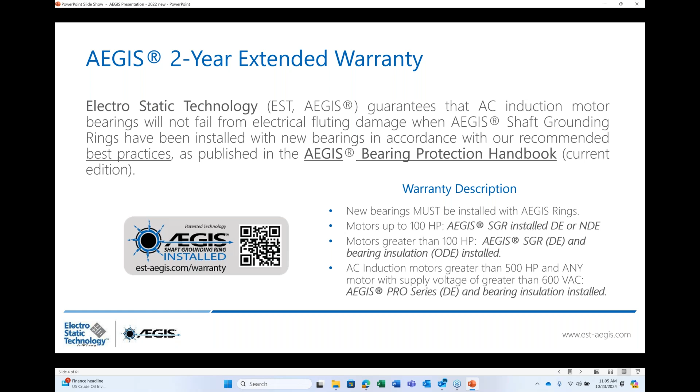So, this is where it all started. Pulse width modulation on a drive, or what's known as PWM inverters, or VFDs, have recently been found to be a major cause of motor bearing failure in inverter drive systems. Now, that was in 1998.

There are many different sources out on the internet, research studies, and that kind of thing. The point of this is that one of the ways that we know electric motors fail in about 50% of the cases is by using a VFD on an electric motor. Doesn't matter who makes the motor, doesn't matter what horsepower it is, doesn't matter what the electrical requirements are, doesn't matter where it's being used. We do see this all the way across the board. I have heard several comments from people saying, well, we do really good maintenance, so we don't have this. The fact here is that if you have electric motors and VFDs, you have this, you just haven't recognized it yet.

So that's literally where it comes down to. It doesn't care what industry it's in. This will cause problems for you between VFDs and motors, and that's not the only way of actually creating problems. Why is this important? Because the cost of having motors go down prematurely is fairly high.

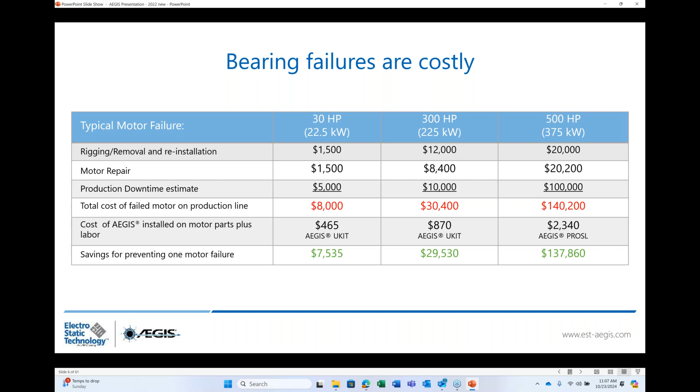So there's two types of currents that we're going to talk about. One is called capacitive EDM currents, and I'll refer to it as induced shaft voltage for this presentation, induced by the VFD, and is picked up by the rotor, acting as a capacitor, and then dissipates through the most conductive path, which is 1 or 2 of the bearings, and then also down the shaft, so you're using a gearbox or a pump or those kinds of things.

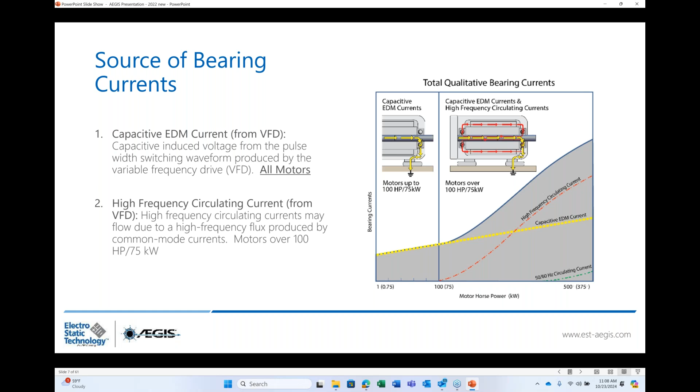The other thing we're going to talk about is high frequency circulating currents. High frequency circulating currents are not something that you see every day, but they're out there and will cause problems, and the problems look pretty much like you have VFDs that are creating problems for your motors or for your bearings. So those are the two things we're going to talk about today.

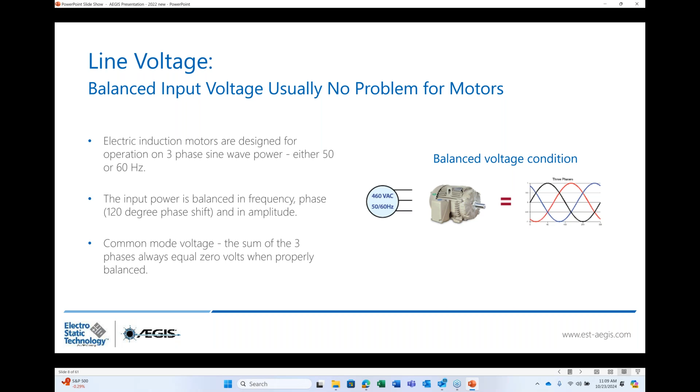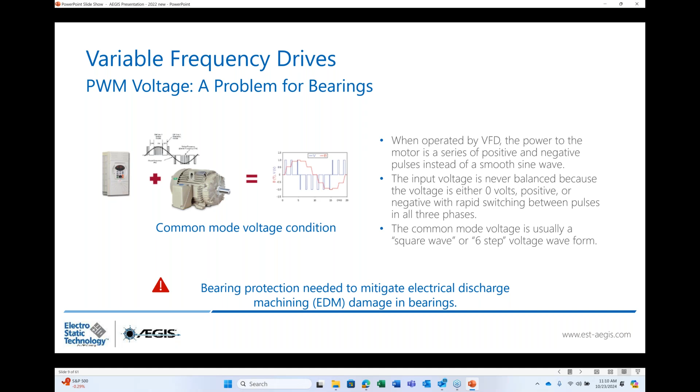That's producing extra energy. Now that extra energy does not actually make the rotor go faster, but is capacitively coupled from the stator onto the rotor, with the rotor acting as a capacitor. So that being the case, it's going to suck up all of these very small stray electrical charges, capacitively coupling from the stator to the rotor, and that's going to live on the rotor. Eventually, when it gets too much for that rotor or capacitor to hold on to, it's going to look for the path of least resistance. That could be the non-drive end bearing, the drive end bearing, or down the shaft into your driven equipment, whether it's a pump, gearbox, any type of machinery. These electrical charges will want to take the path of least resistance.

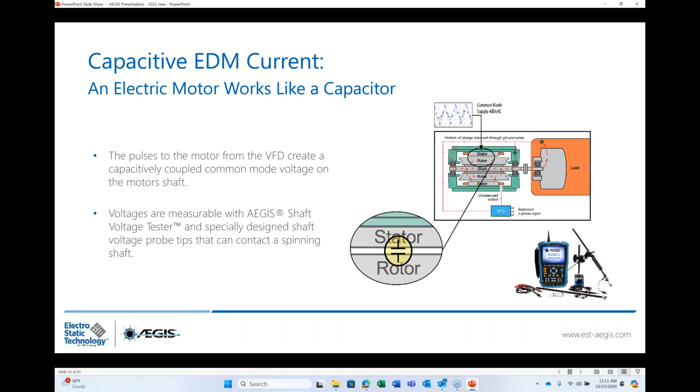So if the path of least resistance is the drive end bearing, it will essentially burn a hole through the grease that's inside of the bearing. Let's use Polyrex as a good example—Polyrex EM is the standard bearing grease for most bearings, and its upper operating temperature is 375 degrees Fahrenheit.

The electrical charge that wants to drive through that bearing and reach the grounded housing of the motor is 1,000 to 1,200 degrees. So by a factor of 3, there is a lot more energy than necessary. Basically what it does is it burns the grease. So if you've used Polyrex, it's blue or green, it turns black. We'll see that in a few pictures, or let's take a look at these right now.

Every electric motor, because the rotor is spinning, that rotor is going to act like a capacitor, and it's going to collect those stray electrical charges. Now this could be the case where you have, say, you're making non-woven fiber. You can have static charge buildup, and it will actually affect many things in your system.

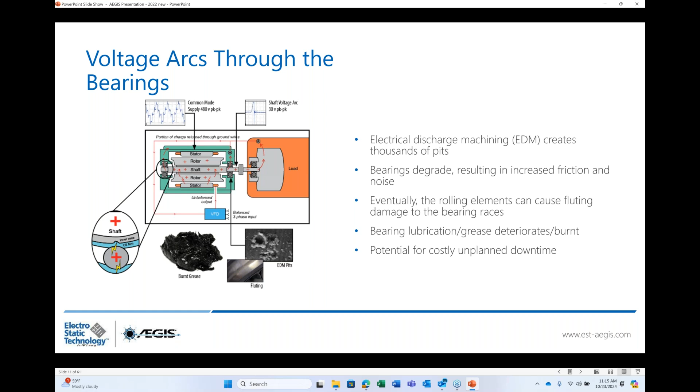Now what we do know is that if I line up 100 motors, and we've done this in many manufacturing plants, data centers, rocket test facilities, I mean everything, what we find is that about 50% of the motors, when you use an oscilloscope, we can find this image on the oscilloscope. Now that doesn't mean that 50% of your motors are going to fail in 2 weeks or 2 months.

There is a correlation between the amount of voltage and how often it discharges. The higher the voltage, and that typically is somewhere between 0 and 35 volts, we've seen it higher, but it's somewhere in that range. Typically we'll see 10 to 15 volts on the shaft. And then you have the rate of discharge, pretty average, 15 to 18,000 times per minute.

That means an electrical charge going through, burning a hole through the grease, and then damaging the inside of the bearing. The rolling element doesn't get damaged, it just turns dull, but the actual outer housing or race on the bearing is going to take a beating. So by using an oscilloscope, you can actually see what's going on without having to pull your bearings out, and you're getting a very accurate picture of what's going on in real time.

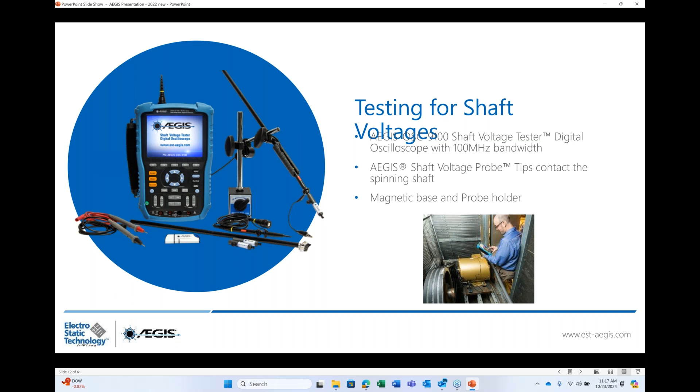If you have this on an oscilloscope, what you're going to find is you will have premature failure of your bearings because, one, they're burning up the grease in there, and number two, you're actually roughing up the inside of the bearing—both detrimental to bearings.

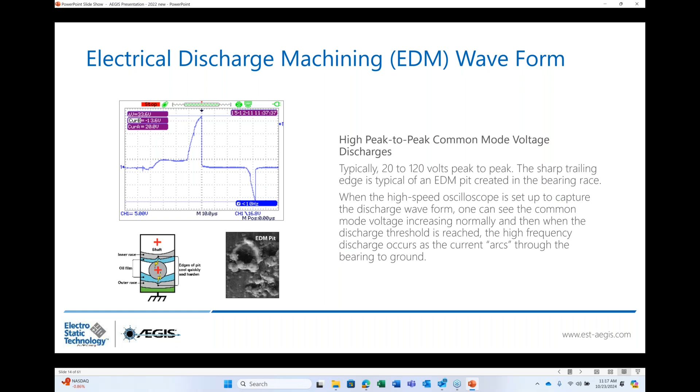EDM, or electric discharge machining, is a fancy word for a spark that goes from the shaft to the inner race, to the rolling element, to the outer race. And the outer race is typically going to show either frosting or fluting.

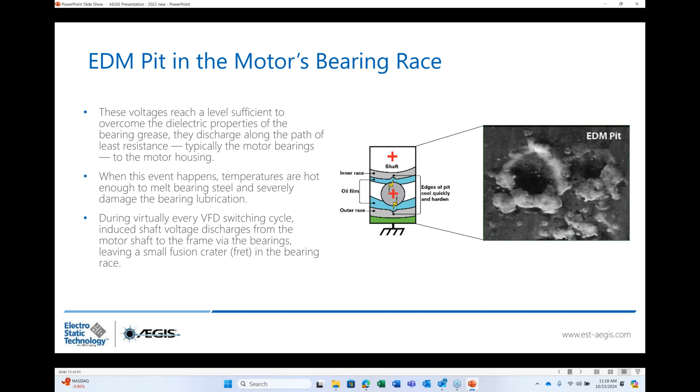The frosting will simply look like a dull gray stripe in the middle of the bearing. But if you magnify it, what you're going to find is that frosted surface is just millions of points where electrical discharge have hit the inside of that bearing. And that's when you start hearing the motor have a howl to it.

The second condition you can often see is what's called a fluted bearing race. This is interesting because it actually puts a pattern on the inside of the bearing itself. When you get to this point that there's fluting, it is really difficult to stand next to, say, a 100 horse or a 500 horse motor and have it run, because you can tell it sounds like it's tearing itself apart.

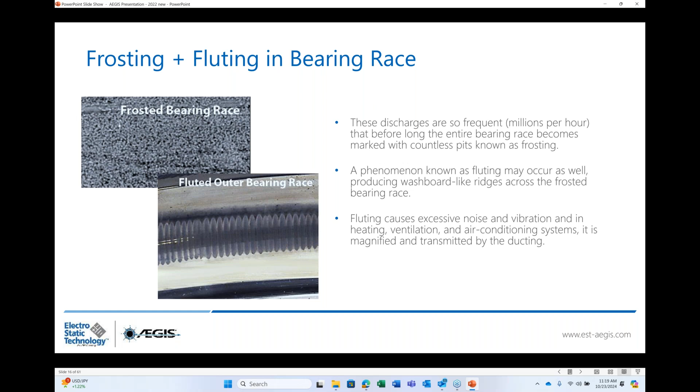So these are the two conditions. If you do a post-mortem on your bearings, which we always say you should do, pull the bearings out, cut the outer race open, and take a look at what you have. If you have frosting or fluting in there, you have electrical discharge that goes through the bearings. So it's important to know your diagnostics here, whether you're using a scope or using the cut and inspect method. Either way, one is a little bit quicker than the other.

So here's a good example of frosting and fluting. Let me go back to this previous picture here. The fluted bearing picture on the bottom portion of this slide looks like it's nice and uniform.

Well, let's take a look at this one. This one is actually fluted, and you can see in the red circle three kind of muddy stripes on the inside of the bearing. That's just how it starts.

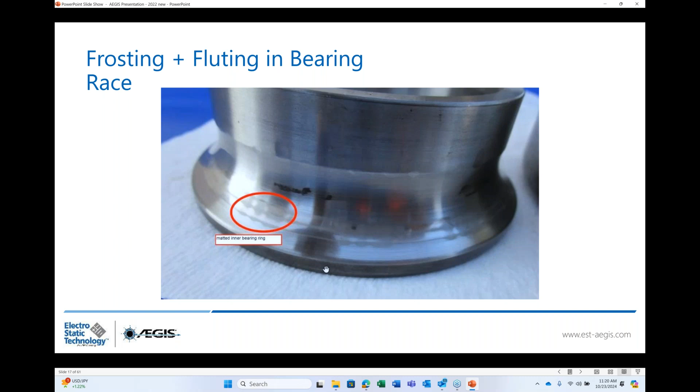Here's another example where you're going to see these lines that go across the bearing. Eventually what's going to happen is those lines will start to fill in. And then that's when you really start hearing a fair amount of noise on the inside of the bearing.

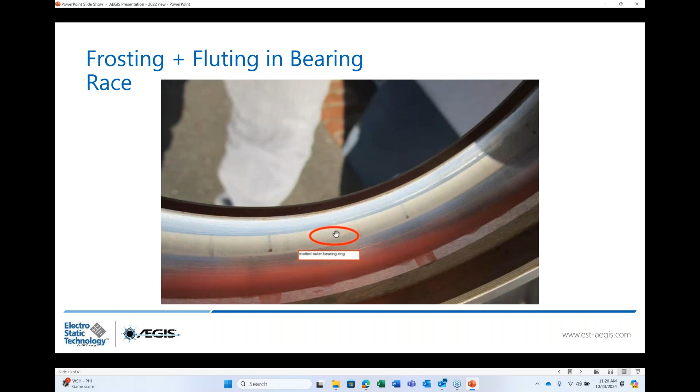We saw this picture before, but it's instructive if you think about it. Always look at your bearings. If you are sending your bearings or your motors to a motor shop, make sure that you ask them to take pictures and give you a report. Your motor shop is the expert on this stuff, and we have done a lot of training with motor shops and that kind of thing to identify what's going on here.

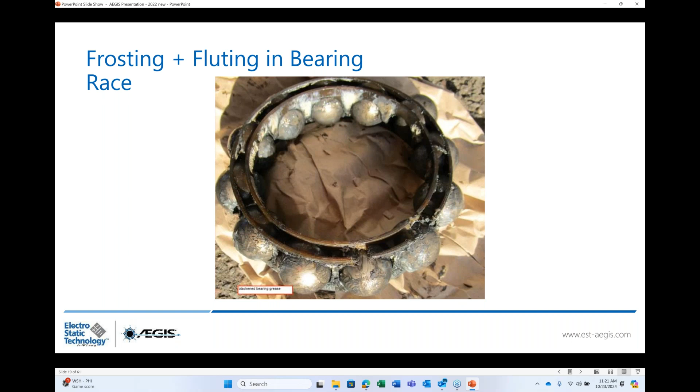Currently, on my email, I have a customer that sent me all the pictures, and they said, hey, we have a problem here. We started this motor up and it failed within 2 weeks, meaning it has fluting on the inside of the bearings in 2 weeks. Those are rather extreme cases. Typically, it doesn't happen that fast, but when it does, it's very frustrating. Either you better have a spare, or you better be able to fix this quickly, because if you take large motors down like this, the production line typically is not going to run very well.

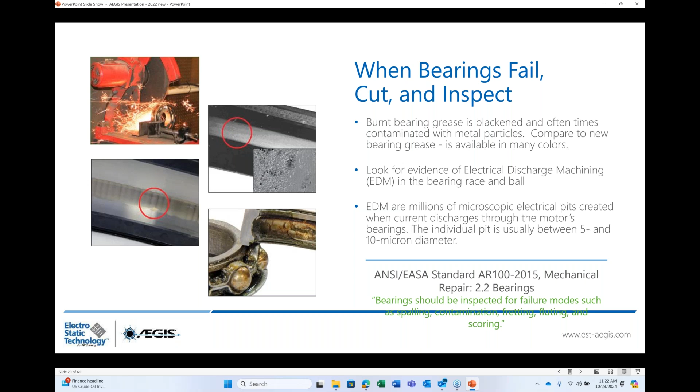So cut and inspect, or actually use an oscilloscope. We sell the oscilloscope, and it works real well. We've got thousands of them out there in the field in all kinds of situations. Whenever I'm called in, I also use an oscilloscope to make sure that we're getting the right diagnosis for that motor.

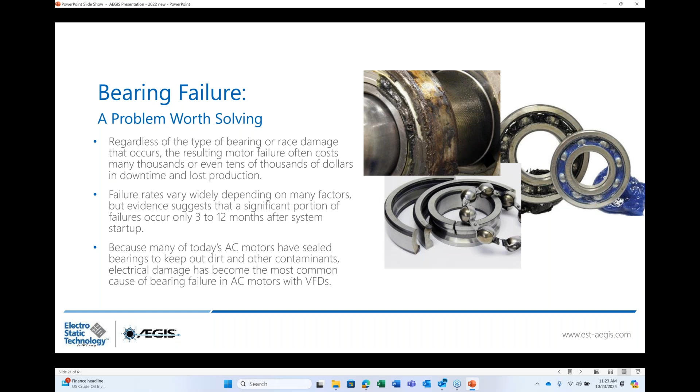So that's where we stand currently on induced shaft voltage. There are many different kinds of electrical problems that you're going to run into with a motor. You can have a situation where you're producing a product that creates static, whether it's non-woven fiber, carpet, polyester, or nylon. Say you're weaving it into a carpet, it creates a tremendous amount of static electricity, and it only gets worse during the wintertime when there's not as much humidity in the air.

But the most common situation we see is VFDs creating these problems. There are no adjustments you can make on a VFD that's going to help this out or eliminate it. It just happens to be the combination of the motor and the drive.

The best way to solve that is to simply use shaft grounding. The most long-term shaft grounding devices on the market today are the AEGIS. We actually published 200,000 hours specifically of runtime at 1800 RPM, so that's double the lifespan of the bearings. It shouldn't be too much of a stretch to figure out that you need

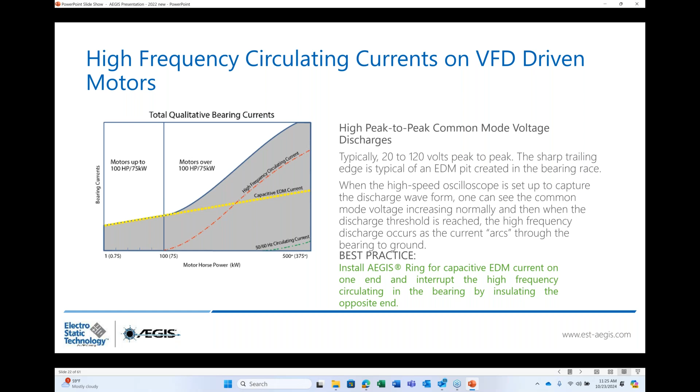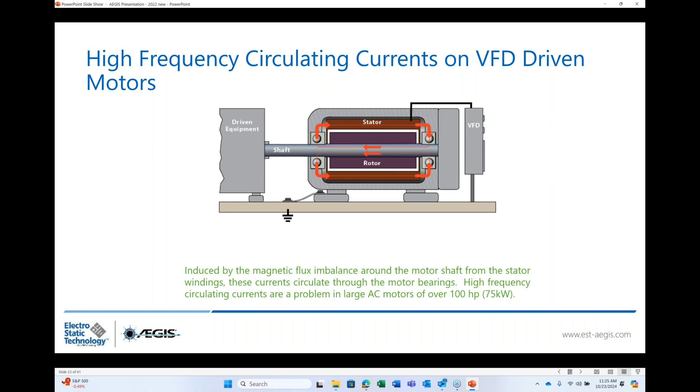So the next thing we're going to jump into here is circulating current. Circulating current is a condition that you're going to find in motors. This is not caused by- this is caused by having issues with your air gap, or having slightly more copper on one end of the motor than the other in the windings. So there's a bunch of different conditions that can cause, or have the potential to cause, circulating currents.

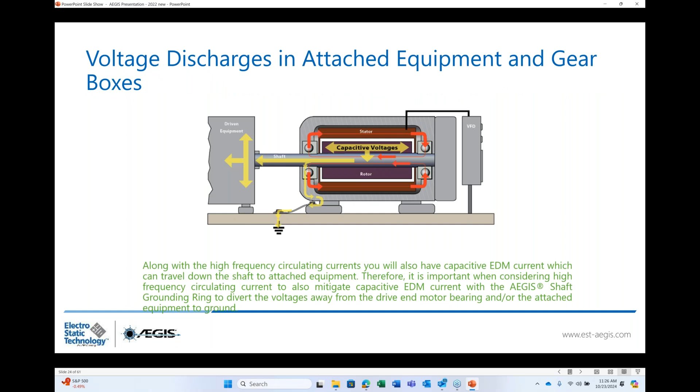These are fortunately very easy to take care of. Use an insulated bearing on the non-drive end, or use an insulated sleeve. Basically what that does is it stops that circulating current from going around. So by insulating a bearing, sleeve, or using a hybrid bearing, it literally stops that - it will give it a path. And then you also want to use a shaft grounding ring.

One of the things that you definitely need to do, though, is to make sure that you have a decent ground. You can put shaft grounding rings, you can use colloidal silver, you can use insulated bearings, but none of these things are going to work if you don't have an active, low resistive ground.

Having a ground, and you can see where we are talking about braided ground straps. Braided ground straps are basically the superhighway for taking that high frequency discharge off the shaft before it goes through the bearings, and then taking it to earth ground safely. We find that using a braided ground strap, because the vast majority of motors out there are AC, or alternating current, the electrical energy travels on the surface of the wire. So what you do is you supply much more surface for that wire, and then you have a low resistive ground.

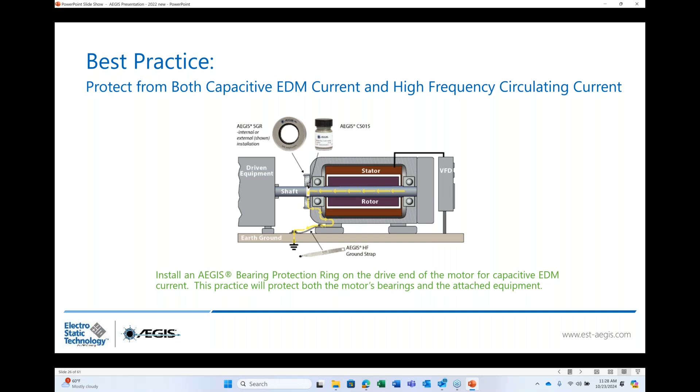So using shaft grounding will protect your motor from any type of induced shaft voltage, as well as circulating current. But for the circulating current, you need to make sure that you use an insulated bearing or an insulated sleeve in the non-drive end. And what you're going to find is that we always separate the insulated bearing. We typically will put it on the non-drive end and then use the AEGIS on the drive end, or vice versa - it doesn't really matter. But you don't want to put them together. You don't want to put the insulated bearing right at the backside of the shaft grounding ring.

The whole idea here is to create a high frequency path for your motor. There's a lot of times that we look at problems in industry, and what we found is there is a tremendous amount of times where there's either poor connection to the shaft with the shaft grounding ring, or there is a poor connection or a high resistive connection for your ground strap, meaning you don't have a good conductive path all the way to earth ground. It is necessary to lead that energy someplace. It's not going to evaporate into thin air. So you need to make sure that you actually have that going on.

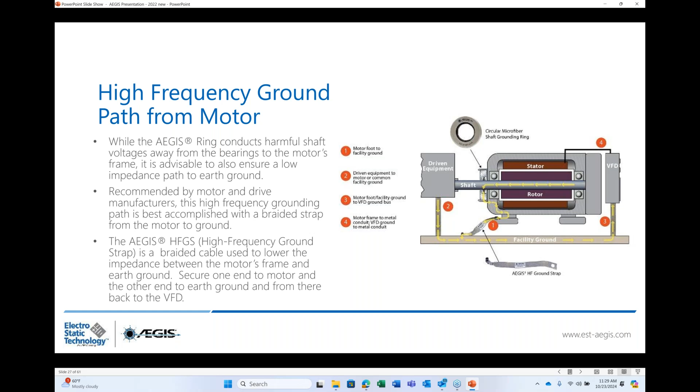With that said, we've covered induced shaft voltage and we've covered circulating current.

There's lots of different types of shaft grounding out there, but shaft grounding is one of those things that you need to make sure you know what you're using. If you use a Helwig carbon block, which is a fairly inexpensive and common way to do it, you have very little contact with that block after it starts running.

One of the conditions you get is something called glazing. Glazing is a clear, smooth finish that is plated out on the shaft and keeps the carbon block from actually contacting the shaft and working. I can tell you that I've been involved in many situations where we've actually tested the motor with and without the carbon block engaged, and it is exactly the same. It should be dramatically different if the carbon block was working.

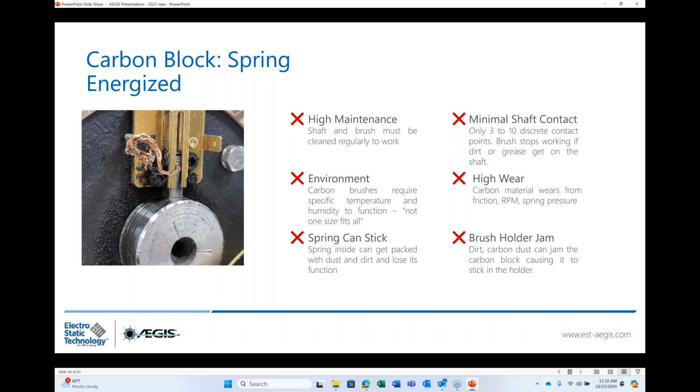Here's a carbon block in action. Creates a lot of carbon dust that gets into everything, including the motor. It's not uncommon to see a brush holder jammed. These do have to be maintained on a regular basis, meaning you have to pull them off and put a new one on. And you definitely get minimal shaft contact because you only get the size of the carbon stick that is touching the shaft that's going to give you that shaft grounding effect, as opposed to using something like AEGIS, which gives you 360 degrees of conductive microfiber, which is highly adept at actually pulling off that electrical charge and does not create glazing on that surface to actually have the ring fail there. So it's 100% shaft contact all the way around.

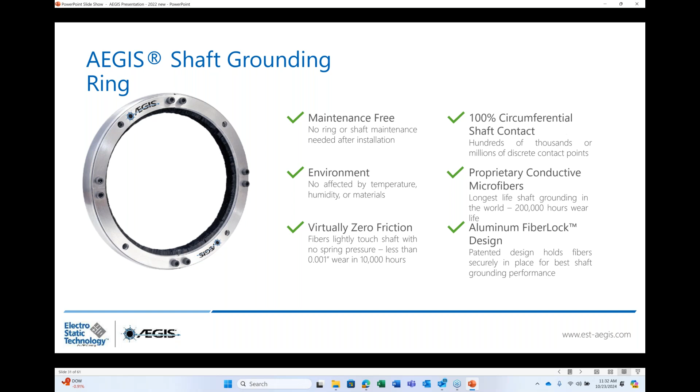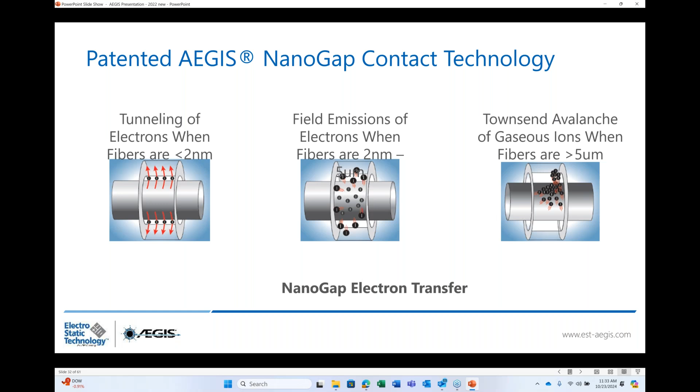If you're interested, tunneling of electrons, field emission of electrons, and Townsend avalanche of gaseous ions is how the AEGIS ring actually works. We have millions of these things in service around the world, and they do an exceptional job.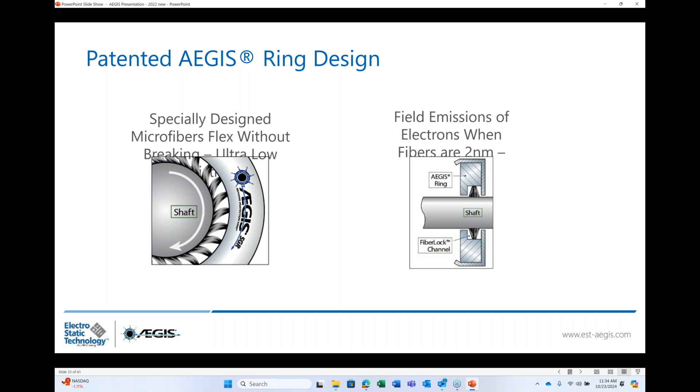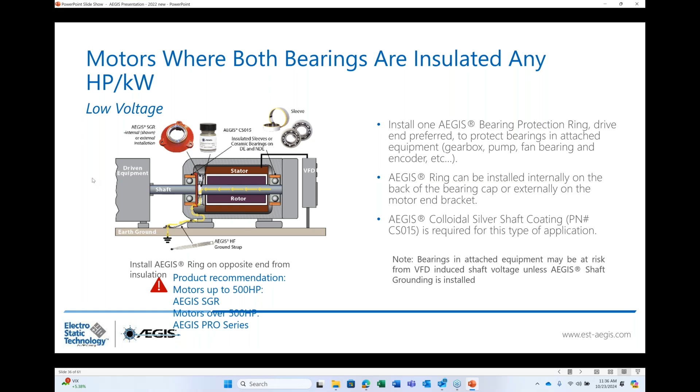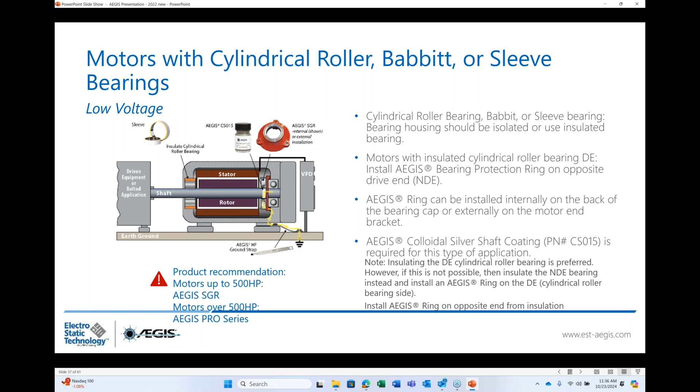Motors with cylindrical, Babbitt, or sleeve bearings. I know there's a lot of very large motors out there with Babbitt bearings. The Babbitting won't have the two conditions we saw before, but you can still see there's electrical discharge, and it will actually end up eating up your Babbitt in there. So cylindrical, roller, Babbitt, sleeve, doesn't matter what kind of bearing it is.

The vast majority of motors in wastewater treatment are vertical motors, whether they're hollow or solid shaft, really doesn't matter. What you're going to find is because there's a lot of metal to metal contact in the thrust bearing, which is at the top of a vertical motor here, in order to protect those bearings on top of the motor, because the whole rotor and everything is hanging off of that, the thinner the grease film, the faster that energy is going to go through that grease film and create a problem there.

So in the upper left-hand corner, you see a bearing carrier that has a white stripe on it. That bearing carrier has been sprayed with either Belzona or another non-conductive product. They spray it on and then lathe it off so that the bearings can fit specifically on the bearing carrier. Now you've isolated the top bearing so that electrical discharge can't get through there.

So now it's going to go down to the bottom, which is your guide bearing. The guide bearing is really important because it's going to keep all your vibration out and keep everything steady. But if you wear it out, it's going to be exactly the same thing. You're going to create problems for your other bearings by allowing vibration to build itself in, and then you end up replacing everything.

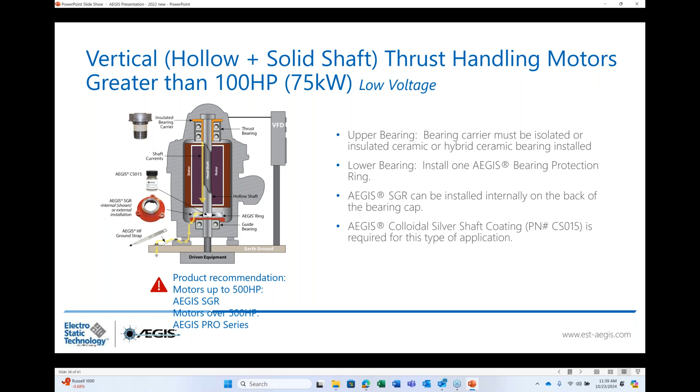So we also talked about the Pro Series, which is a 6-row ring for larger motors, typically 500 horse and up. And by the way, if you have a production motor, it's not uncommon for 400 and 300 horse to mount a Pro Series ring on there. These are for motors that run 24/7 and are looking to get the longest life possible out of them.

So the Pro Series is a whole category of motors that we can mount shaft grounding to in a variety of ways. You can see we have spacers on this one with brackets that come out, and everything gets screwed together with threaded holes so that you can mount it on the shaft. You can see the discoloration, the silver on the shaft next to the ring. That is where somebody has gone a little bit berserk with colloidal silver.

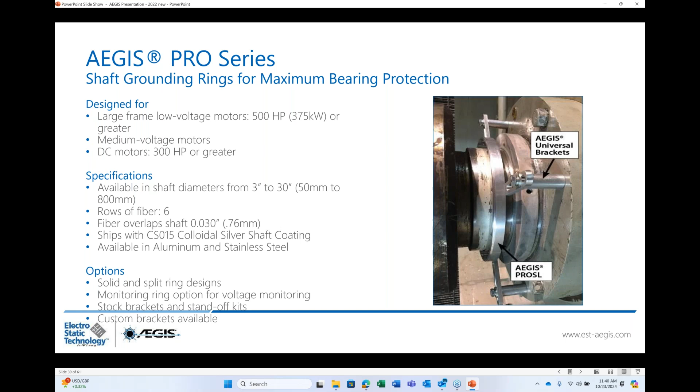Colloidal silver works, use it. It's micron particles of silver, and it is held in place by all the imperfections in the shaft, whether it's machining or pitting on the shaft, and you would have to chemically scrub it to get it out of there. So use colloidal silver — that makes a big difference.

So there's lots of different types of Pro Series rings out there.

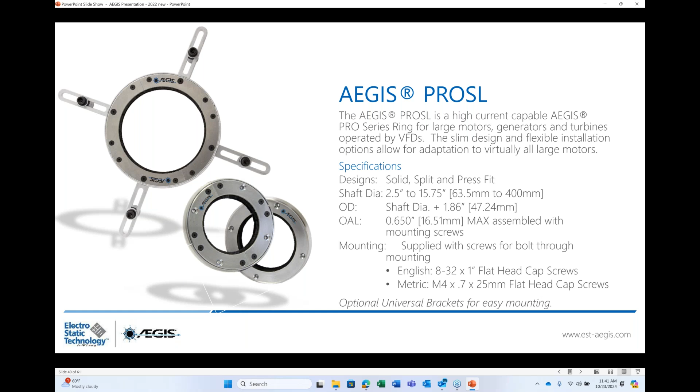SL is simply known as a slimline. It's 5/8 of an inch thick, not including the brackets and bolts, so we can fit them into pretty small spaces. It also comes with all the mounting hardware. If you order the hardware package with it, it comes with all the different spacers, bolts, the whole works.

So internal as opposed to external applications. It's important to understand that you can use AEGIS either inside or outside the motor, not a problem. But you have to make sure that if you're going to mount it on the inside, you have replaced the grease seals, and you are not going to pump in pounds of grease. It's grams of grease over a period of time, and you can go out to the internet and figure out how much grease you should be using on that bearing over what period of time, depending upon what speed it runs at, type of bearing, and how long it runs, whether it's 24/7 or something less than that.

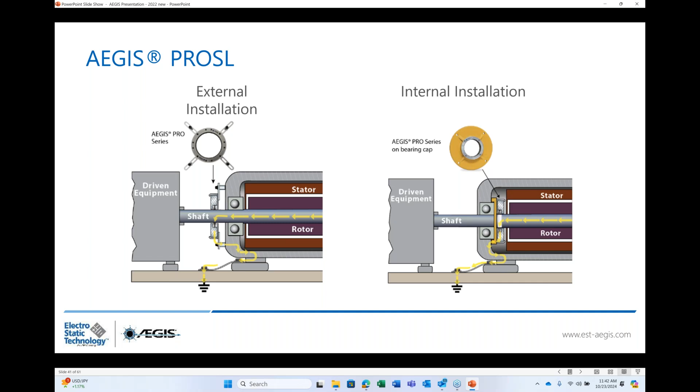The only caveat I can tell you about using an external ring is if you use them in severely dirty environments, say you have a paper mill that has a lot of fiber in it, or a steel mill that has a lot of carbon running around, those kinds of things have a tendency to gunk these brushes up. So we actually have brushes that have things like O-rings built into them. But if you have a dirty environment, see if you can't have your motor shop put it on the inside for you.

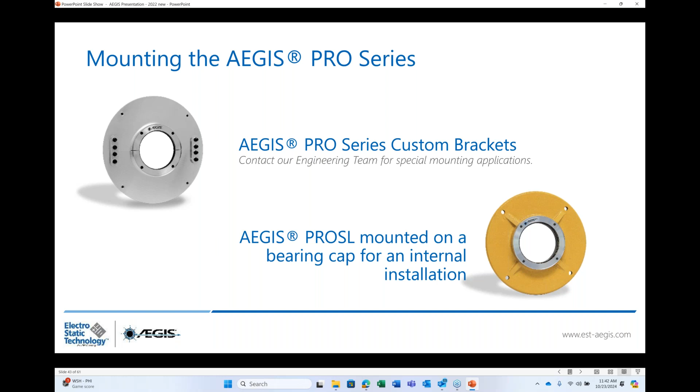There is a myriad of different conditions, so we produce a vast variety of bracketing and plates and all kinds of stuff specific for your conditions.

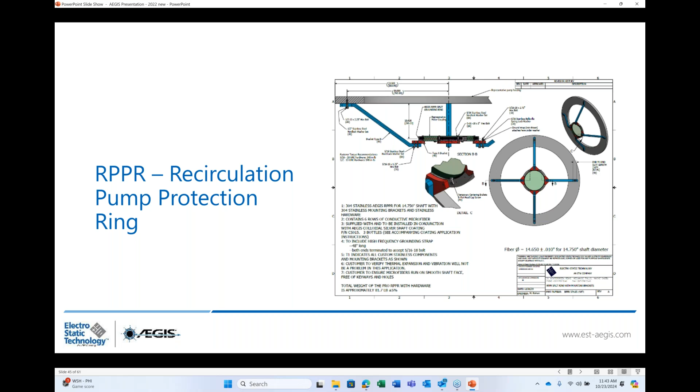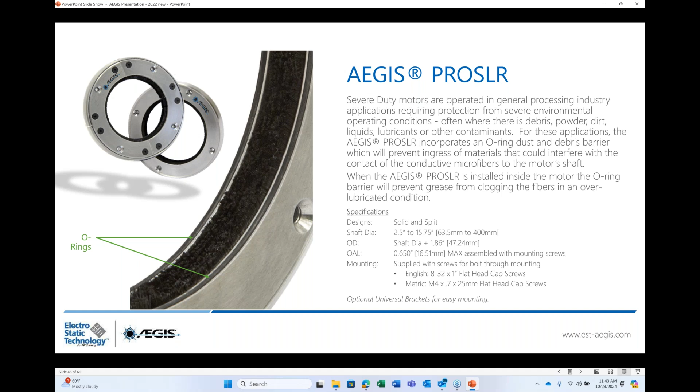I talked just a few minutes ago about O-rings. If you can't get it on the inside of the motor in a dirty environment, you can also order it with O-rings. The O-rings are not a seal, but they're a dirt barrier, if anything. They do not turn. They are static with the brush itself, and then the shaft turns against those.

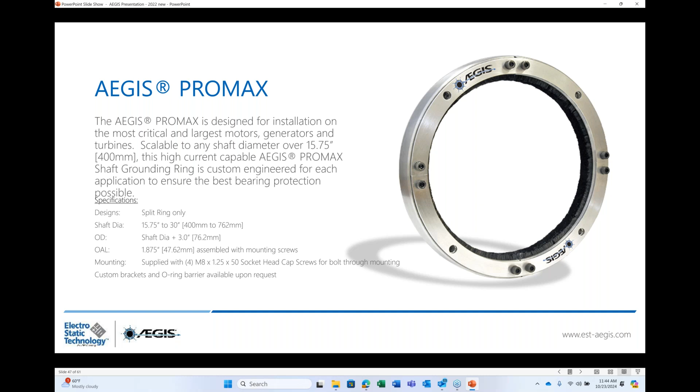There's a Pro Max. Once you get to a certain size, 15 3/4 inch, they're not going to be as stiff as they should be, so they go to a heavier design. If you let us know what you have, we'll tell you what the best application here is for that.

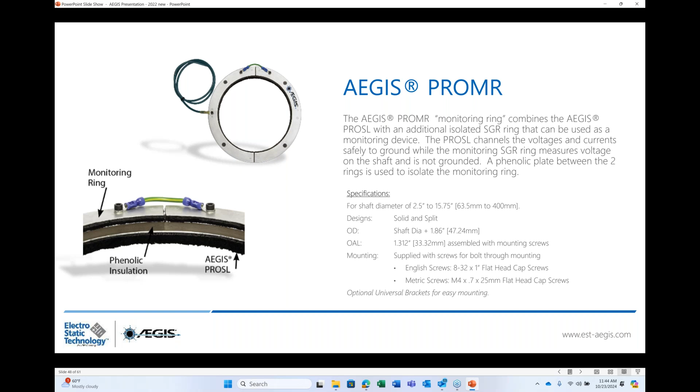So a typical situation here is using AEGIS on the drive end of the motor, and it doesn't have to be on the drive end, it just happens to be there's more room and availability to put it in there. So using shaft grounding, using colloidal silver, if it's over 100 horse, make sure that you use an insulated bearing. That will stave off a lot of problems specific to circulating current.

And then also use a braided ground strap. I will tell you, I have customers that say, great, I'm just going to order braided ground straps, I'm not going to put an AEGIS shaft grounding ring on there. Well, the energy builds up on the rotor, and the rotor and the shaft are integral to one another. So just putting a grounding strap on there isn't going to cut it. You actually have to pull that energy off the shaft and then direct it to the outside housing of the motor so it can exit with a braided ground strap.

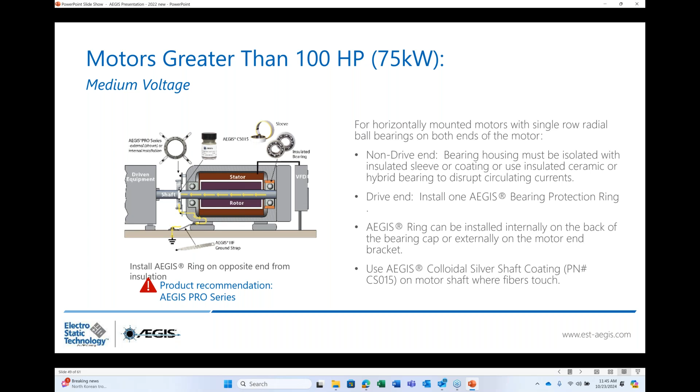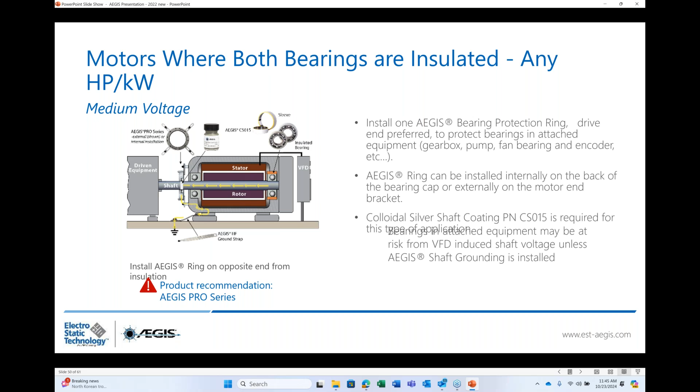Putting a braided ground strap on without shaft grounding is of no value. Where you have both bearings that are insulated, use shaft grounding, use colloidal silver, exactly the same condition that we were talking about before, with motors with cylindrical Babbitt sleeve in medium voltage. Again, whatever the particulars you have on that motor, we will be more than happy to give you the correct products for your application.

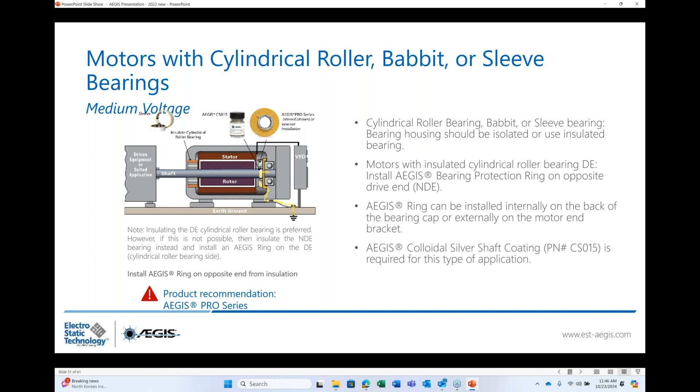Motors greater than 100 horsepower, vertical solid shaft motors, exactly the same thing, where you're going to be using insulated bearings and then AEGIS shaft grounding.

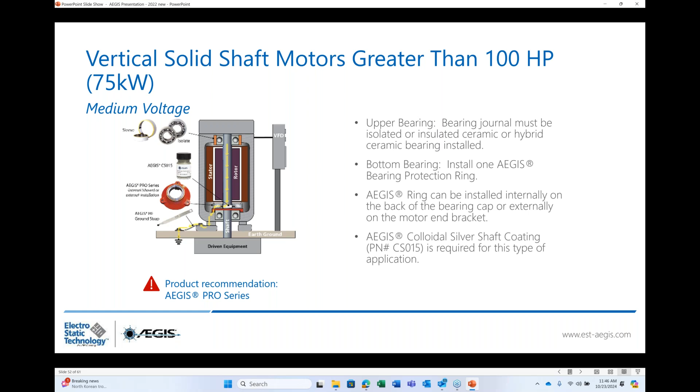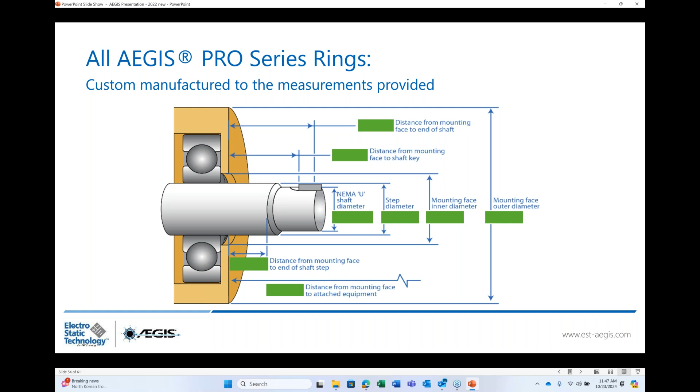We went over this one already. The best thing to do is that before calling us, take a picture of the nameplate and a picture of the end bell of the motor so we know what we're looking at. There is a shoulder on some of the shafts out there, probably about 50% of them, so if we can mount it on the shoulder, that works well. If not, we can actually extend it out. There's a myriad of different conditions. You have the motor, tell us what conditions you have, and we'll make sure you get the right product for that application.

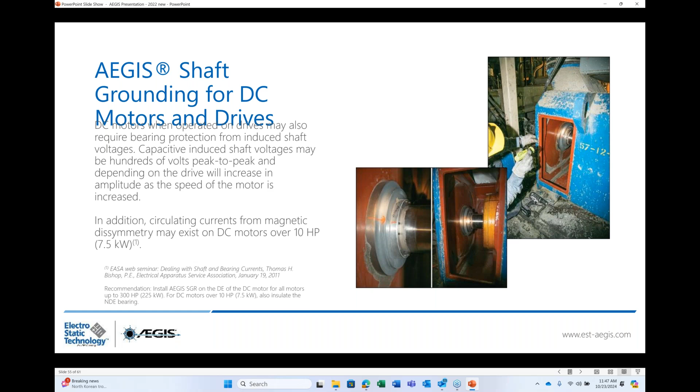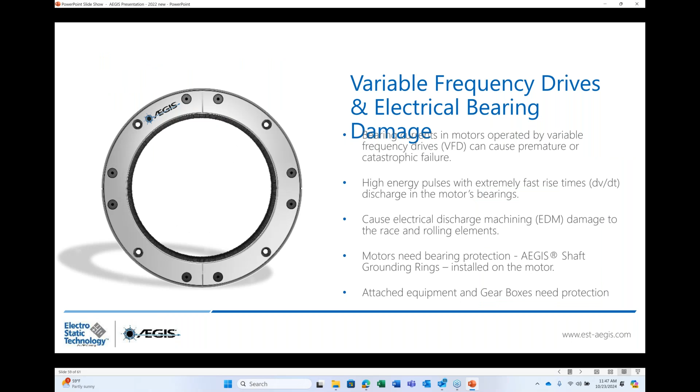If you happen to have DC motors, AEGIS works for DC motors just the same as it does for AC motors. Press fit, bolt through, pretty much every kind of situation you can imagine there.